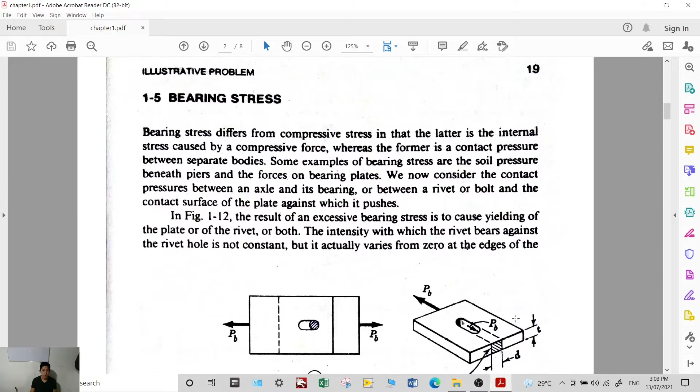Bearing stress differs from compressive stress in that the latter is the internal stress caused by a compressive force, whereas bearing stress is caused by contact pressure between separate bodies. Bearing stress happens when there are two objects in contact.

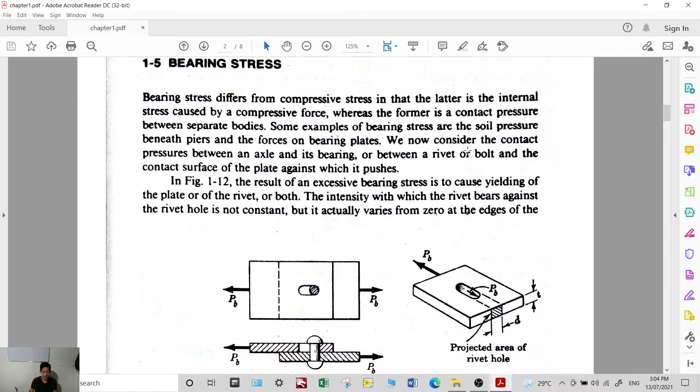For example, we have this rivet connecting two plates. When you pull these two plates, what happens is when the rivet surface contacts the face of the plate, a bearing stress is induced.

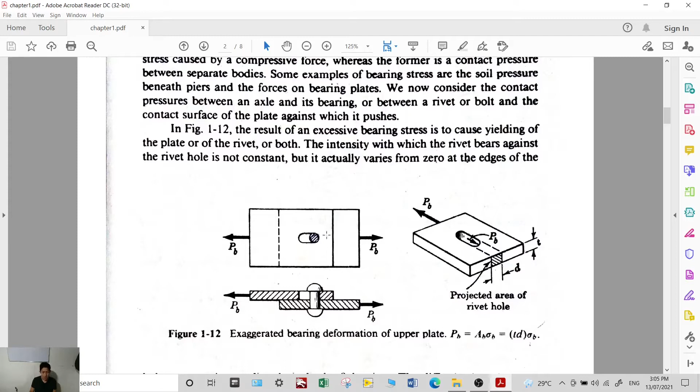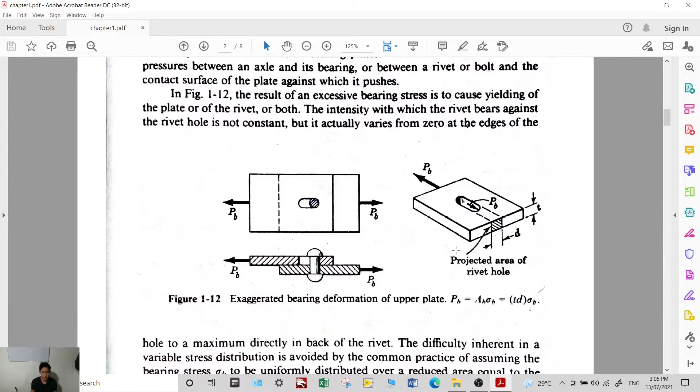In order to calculate that bearing stress, the formula is just force over area. Therefore, the bearing stress is equal to PB over the area that is in contact.

What is that area? This is just equal to this projected area, which is equal to the thickness times D, the diameter of the rivet. If you project this face, you get D times T.

Therefore, if you want to get the value of this force, PB is just equal to the diameter times thickness times the bearing stress.

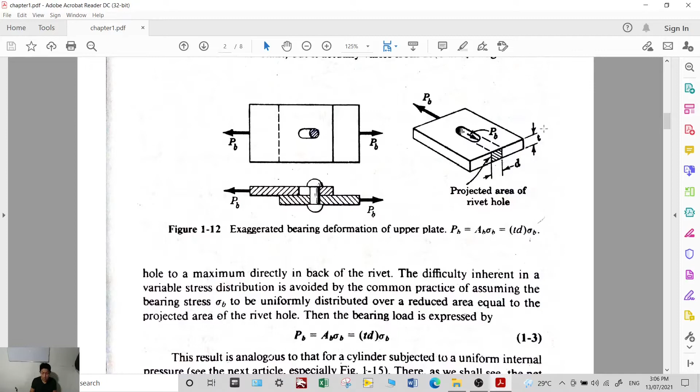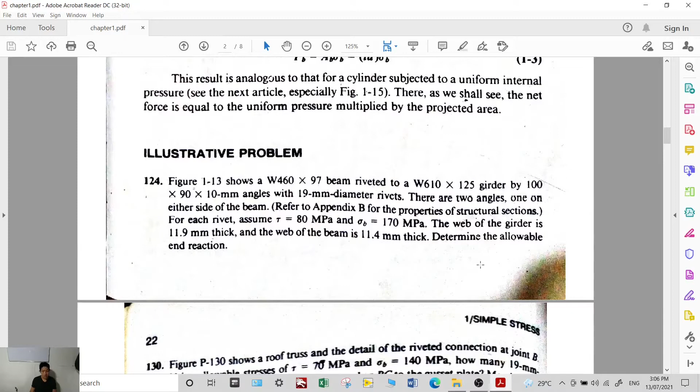We'll proceed with analyzing thin-walled pressure vessels. For this lecture, we will be analyzing the tangential stress and the longitudinal stress experienced by the cylinder due to the fluid pressure. So you have a thin-walled pressure vessel.

The definition of thin-walled is that the thickness over the diameter must be less than 1/10 in order to be called a thin-walled pressure vessel. If greater than that, it is already considered thick-walled, so the equation for that is different.

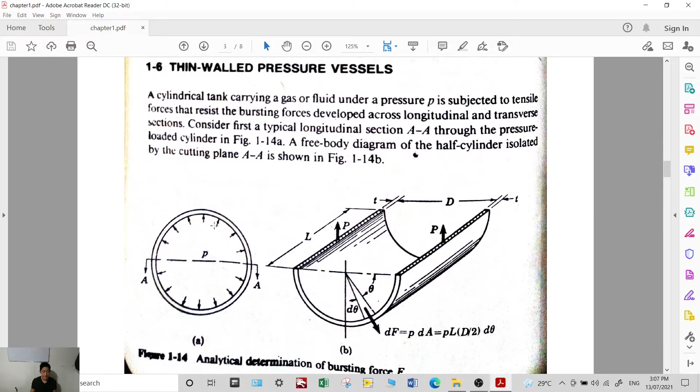Imagine that you have this thin-walled cylinder, and it has a gas inside. The pressure inside the cylinder will be distributed around the area, exerting a force perpendicular to the areas.

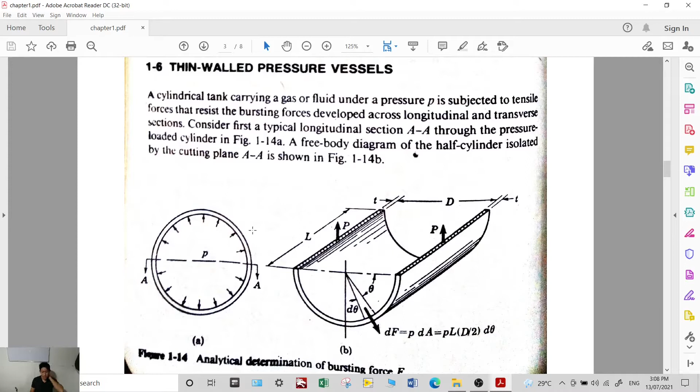So the question is, how do we analyze or design the pressure vessel such that it does not burst, does not fail? Let's cut a mid plane, section A.

So what are the forces that are involved? You have a force that could be anywhere along this area. For the general case, let's assume that it is at an angle theta, and you have the differential force.

Pressure is just force over area. Therefore, in order to get this differential force, you just multiply the pressure times the area. This area is perpendicular to your force, and this area is curved.

It's like an arc segment. So the equation for dA, the differential area, is just d theta times the radius, which is d over 2.

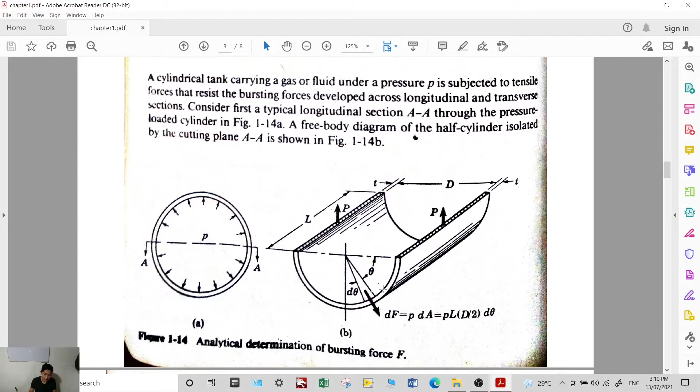Since this area is curved, you also multiply it by the length, L. Therefore, the differential force is just P times L times d over 2 times d theta.

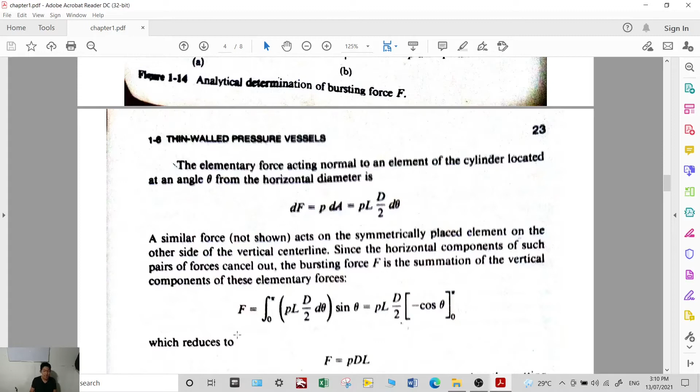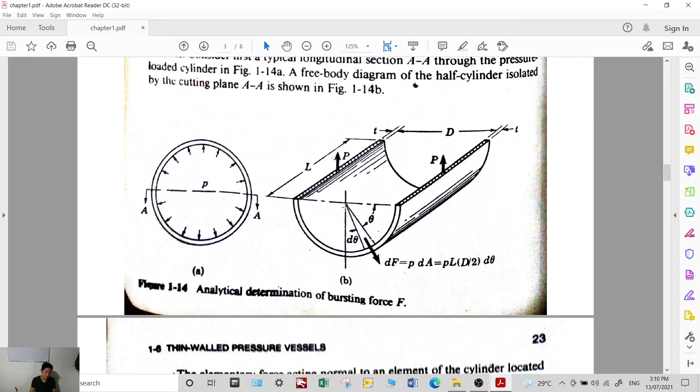Now, if we want to get the total force, we add them all up. But take note, for any force here, its horizontal component is also exerted equally in the opposite direction, so all horizontal components cancel out.

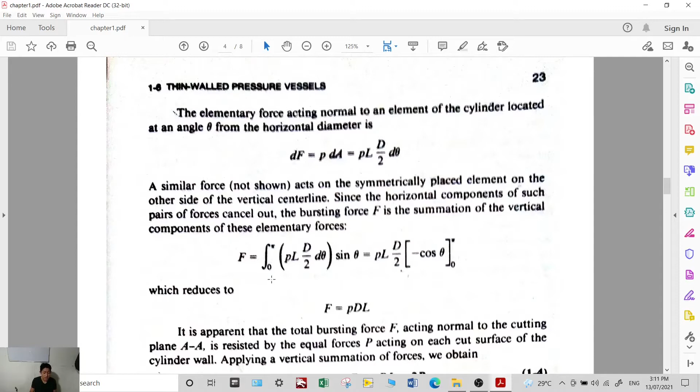Only the vertical force contributes to your total force. So you integrate from 0 to pi, adding all the terms: P L d over 2 d theta times sin theta. The sin theta term represents the vertical component, since the horizontal components cancel out and only the vertical component induces the stress.

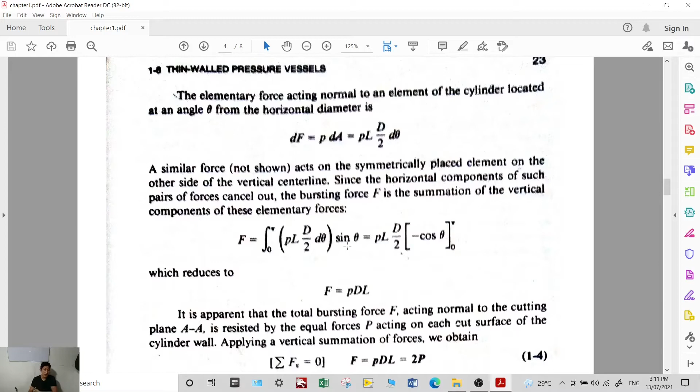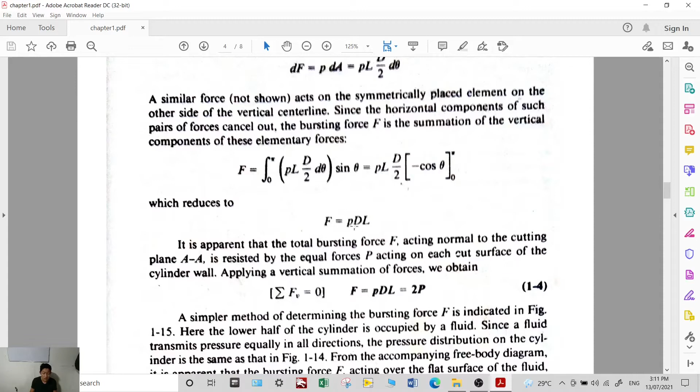So this is just equal to PL d over 2, negative cosine theta from 0 to pi. If you substitute here, you will get total force is just pressure times dl, or like pressure times area, projected area d times l.

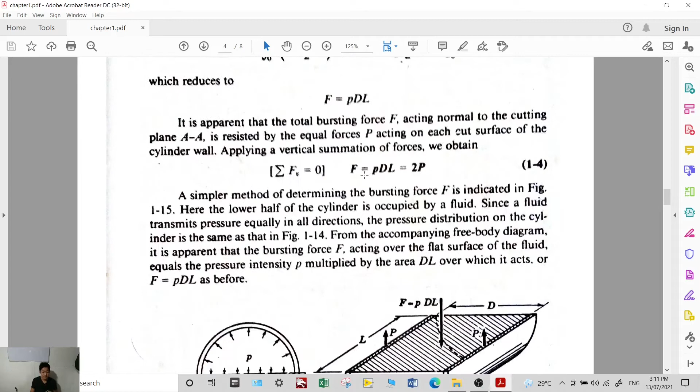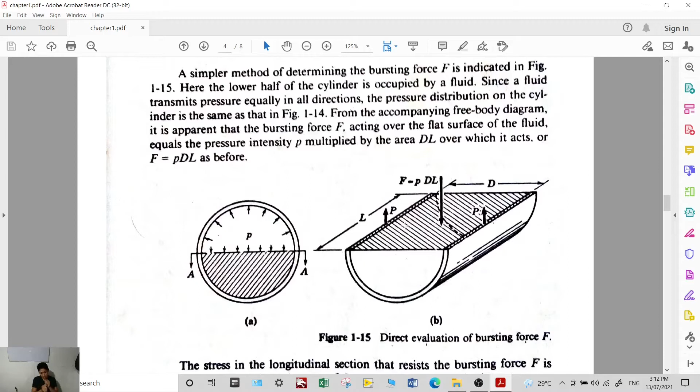So this becomes d times l, P pressure times dl. This is the force that will try to burst your cylinder. So at the bottom of the cylinder, this is counteracted with an opposite force P. If you sum these forces, you'll find out that the force F is just equal to 2 times P.

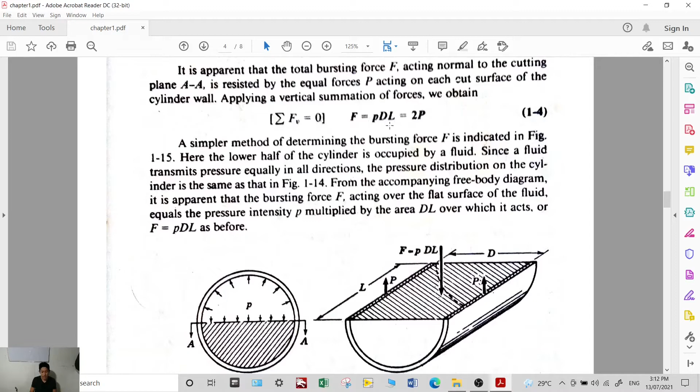And then the stress in the longitudinal section, this section here, this small one since it's thin. The stress in the longitudinal section that resists the bursting force F is obtained by dividing it by area.

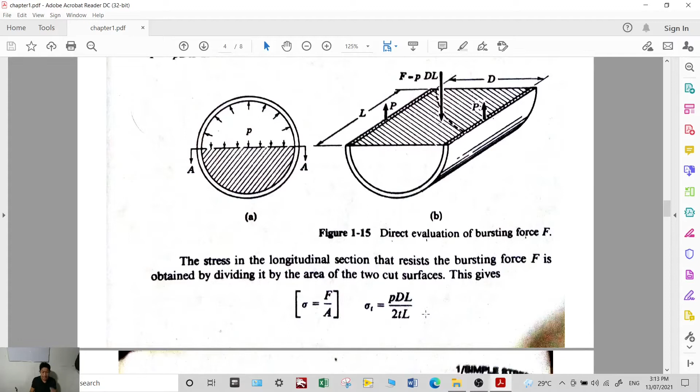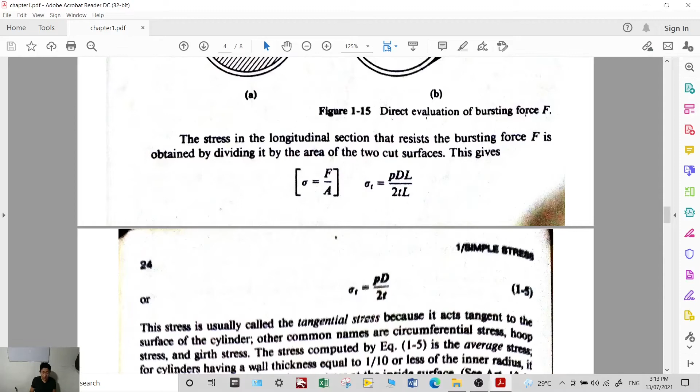So you have force. What is the force? P d L over 2 T L. 2T because there are two areas, two thicknesses times L. So we cancel out the L. We found out that the tangential stress, the stress experienced here, is just equal to PD over 2T.

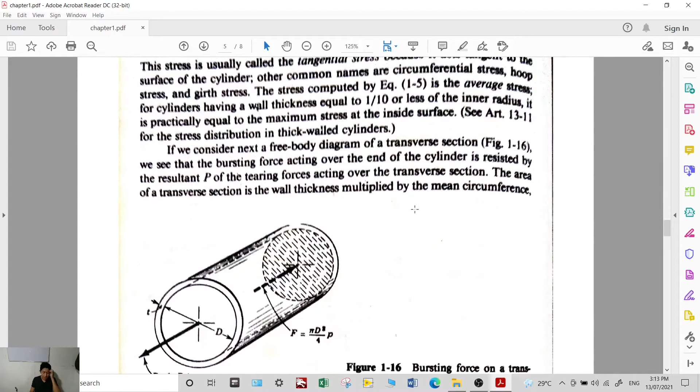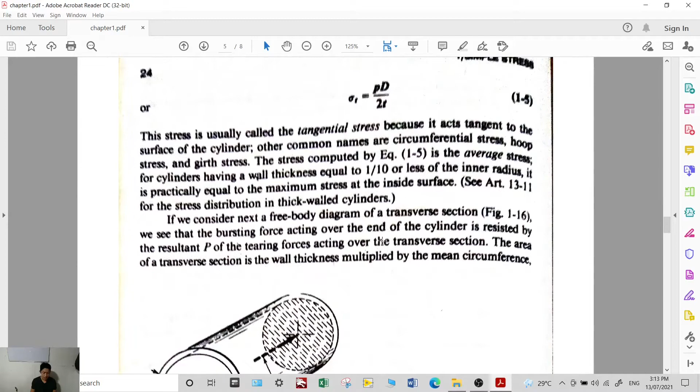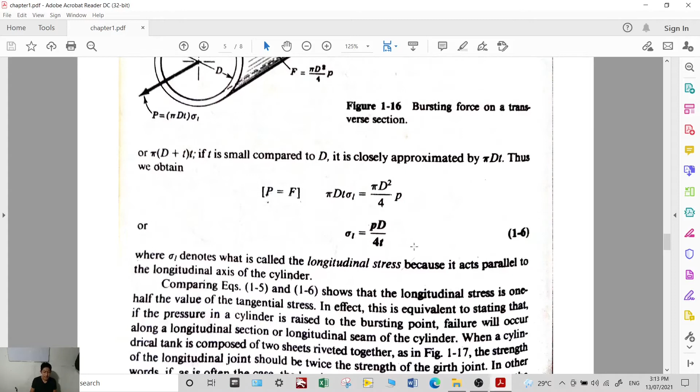So that is for the tangential stress. How about for the longitudinal stress, or the stress you experience at the end of your cylinder?

So how do we derive that? Again, you have the bursting force, which is just pressure times area. So you have P, so what is the area? That area from before. The area is pi d squared over 4. So this becomes that, and then it's resisted by.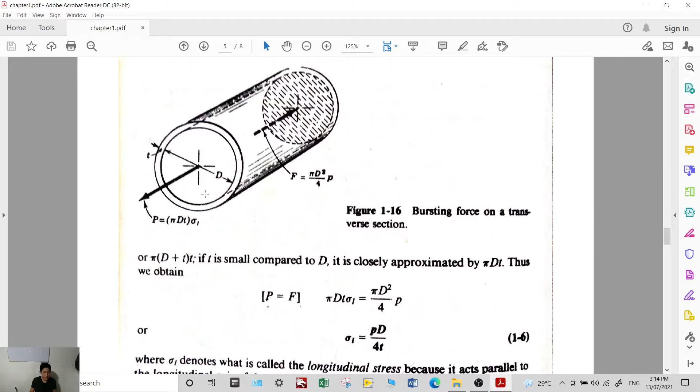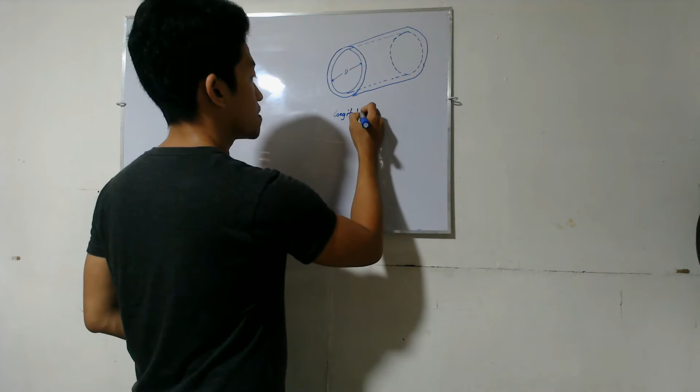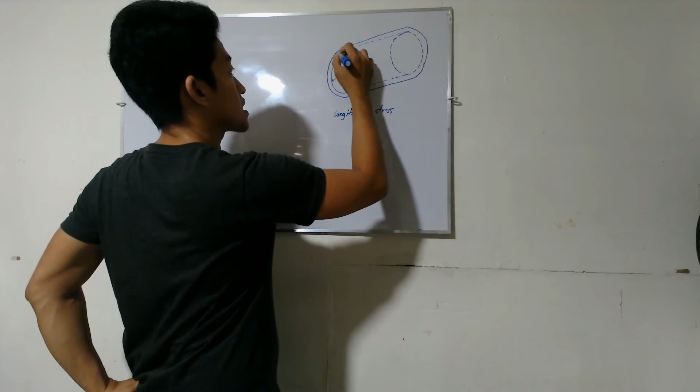Let's derive the longitudinal stress for a thin-walled pressure vessel. So the longitudinal stress will be experienced at this area of your cylinder.

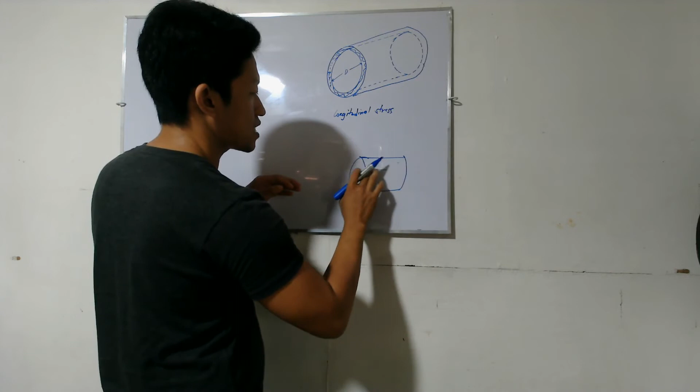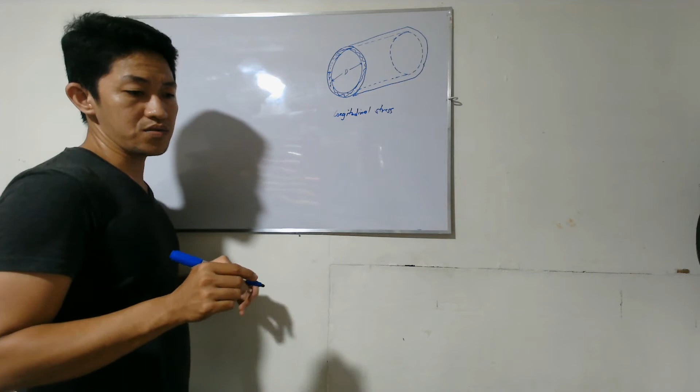First, you determine the forces that will try to burst your cylinder. It is caused by the pressure of the gases inside.

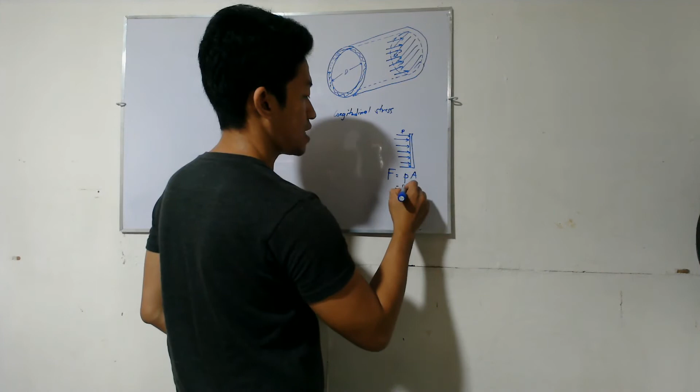So the bursting pressure force is just pressure times area. So what area? This area. So that is P times pi d squared over 4.

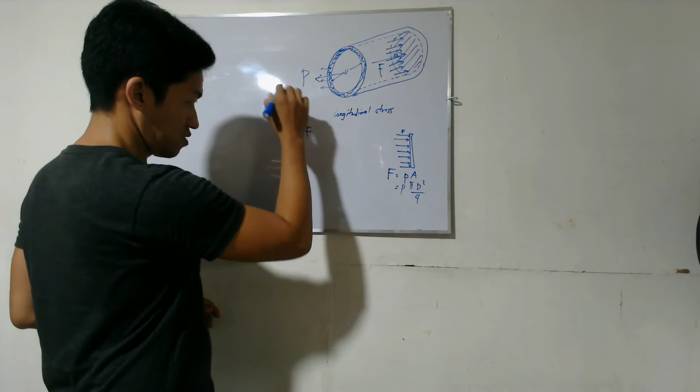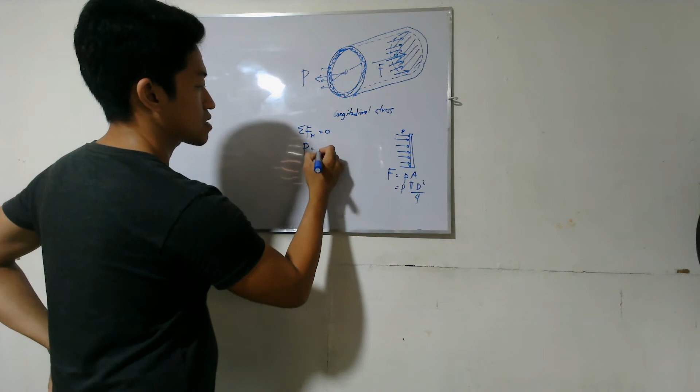If you sum all these forces, you get capital F. Therefore, summation of forces along the horizontal is equal to 0. So you have capital P is just equal to F, or that F is P pi d squared over 4.

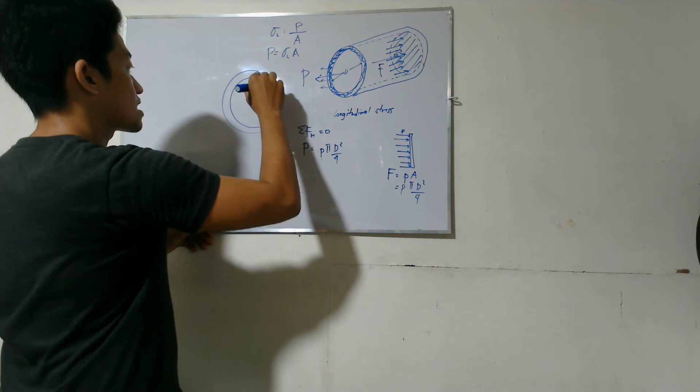So what is this area? This area here. Not D, this is T, thickness.

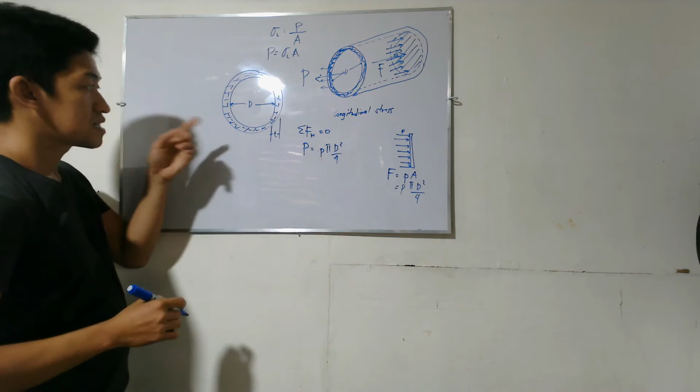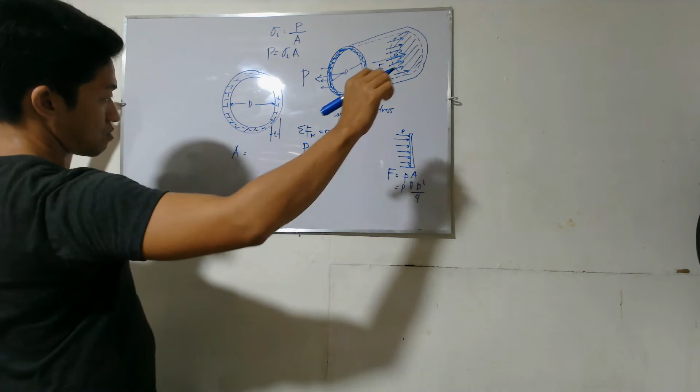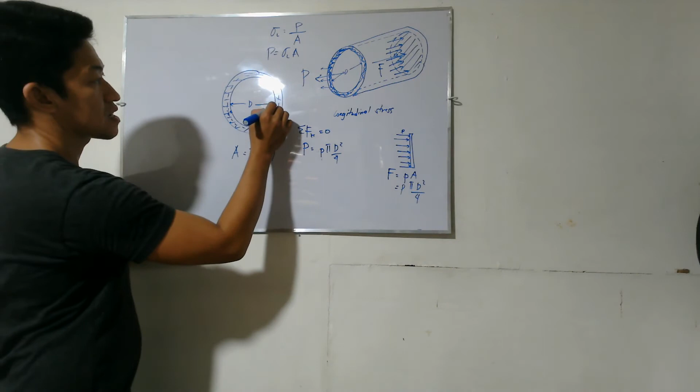Kay kuan man 1/2t, 1/2t. Kung i-add nimo ni 1/2t plus 1/2t, so mahimo ning d plus t. Circumference pa ni, circumference, para mahimo ning area times nimo og t. Kay length pa man ang circumference, so unsa ang length ani. Mao na siya. Therefore, mahimo na ning sigma L.

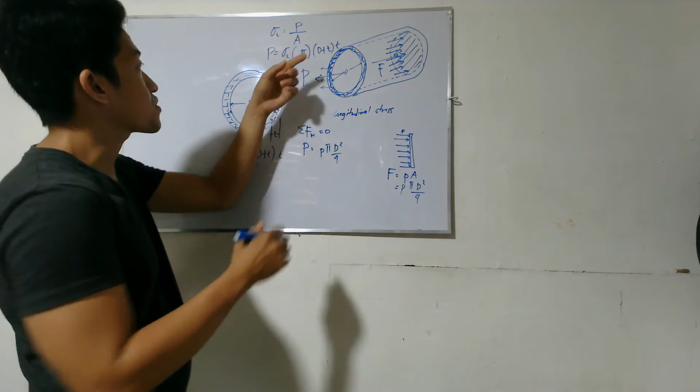Pi times d plus t times t. But if t is small, usually compared to d, kung gamay pwede nimo ni approximate to d na lang. Okay, so mahimo na ning P is just sigma L pi dt. So ato na siyang i-substitute dire, you have sigma L pi dt is P pi d squared over 4. Cancel lang isa ka d.

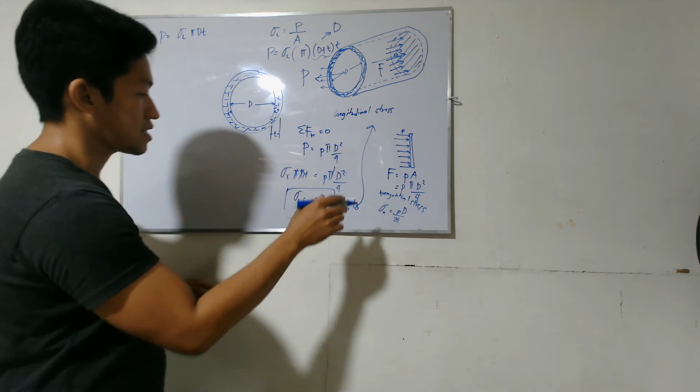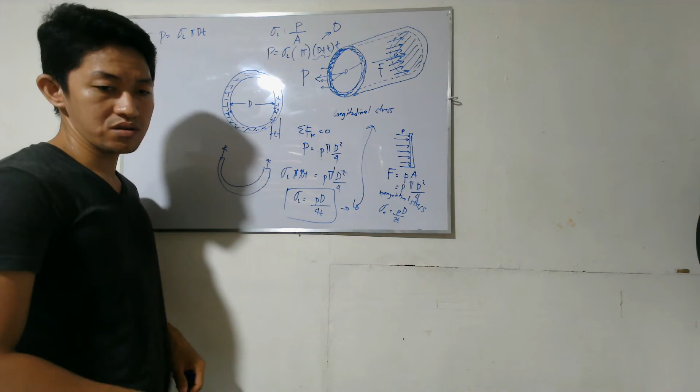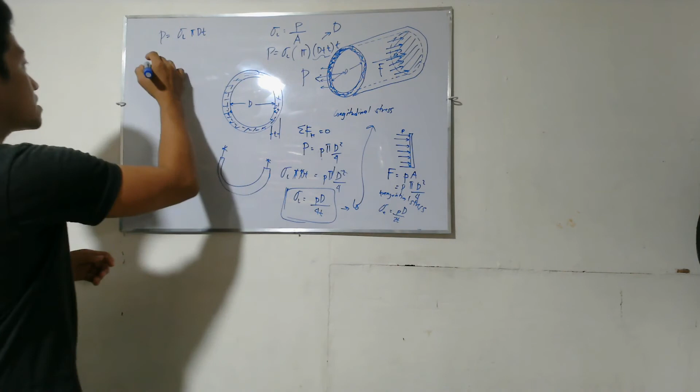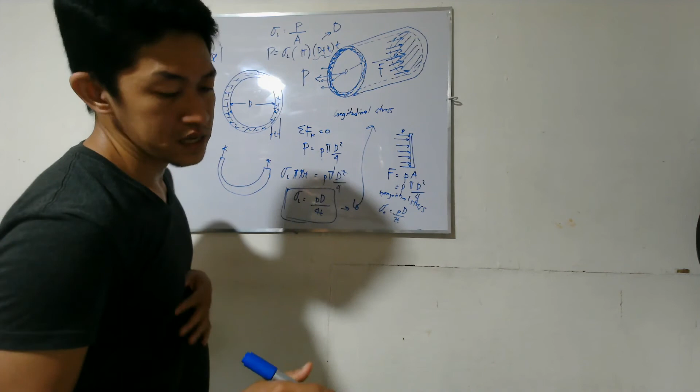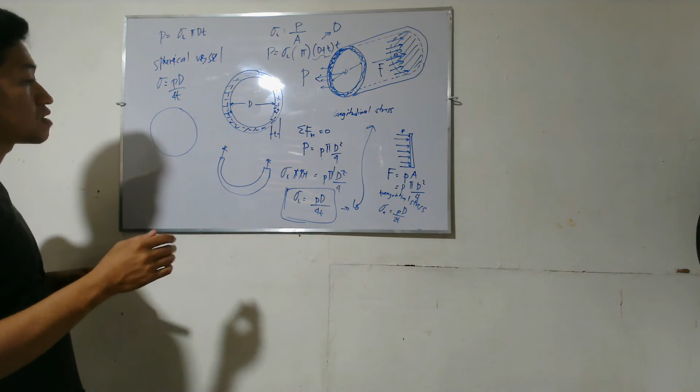Okay, for a sphere, spherical vessel, thin-walled gapon, isa ra ni siya kay pagkuha nimo sa sphere, isa ra man na siya. So for a spherical vessel, ang stress experience niya is thin-walled spherical vessel. Sigma is PD over 4t. So almost the same sa dire, for a spherical vessel. Mas ano ni? Gamay, weak.

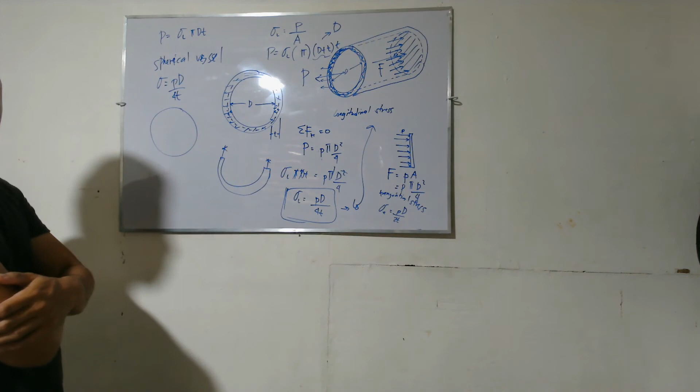So unsa man yung mga parameters kinahanglan ninyo? P is pressure, diameter. Tulo lang, no? Pressure, diameter, and thickness. That's it.

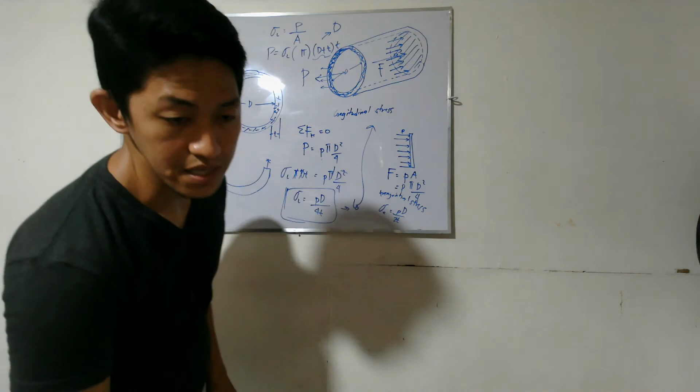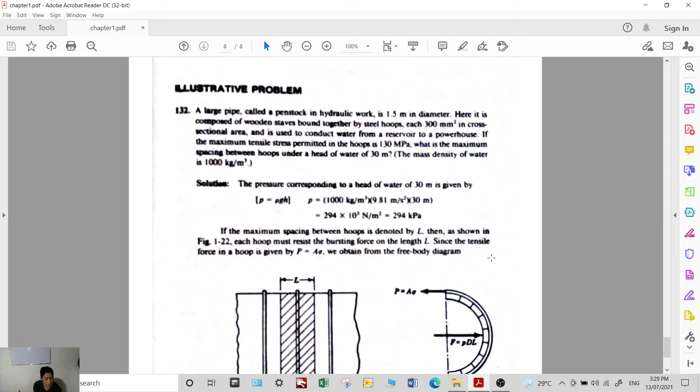Okay, so let's have an example in analyzing a thin-walled pressure vessel. So you have a large pipe called a penstock in hydraulic work. Now the diameter is 1.5 meters. This pipe is composed of wooden staves bound together by steel hoops, each 300 mm squared in cross-sectional area, and is used to conduct water from reservoir to a powerhouse. If the maximum tensile stress permitted in the hoops is 130 megapascal, what is maximum spacing between hoops under a head of water of 30 meters? The density of water is 1,000 kilogram per m cube.

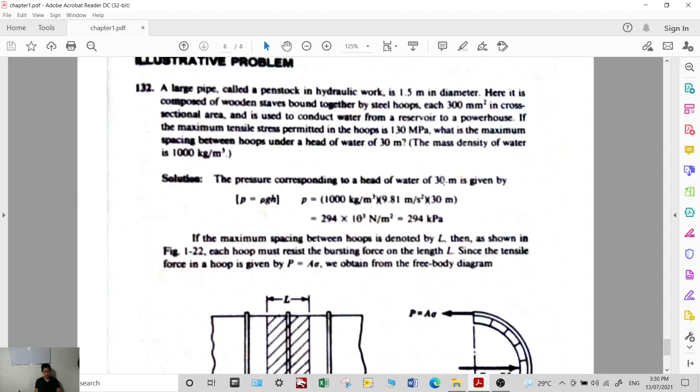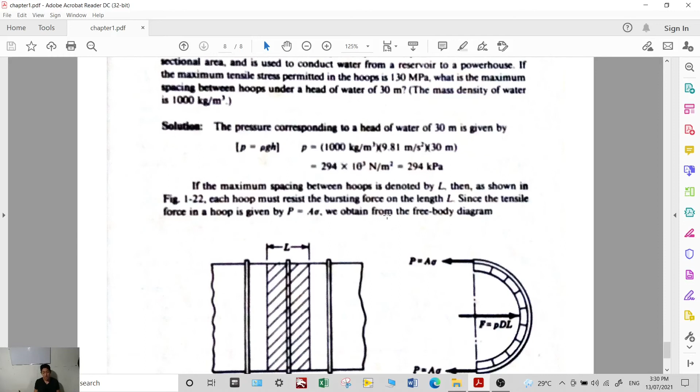Okay, so what is asked is this one, L. Unsa daw ang spacing ani? Ang spacing sa imong hoops. Okay? So in order to derive that one, we need to solve first or get first the free body diagram. Okay? So kung mo-cut nimo imong pipe, i-cut na ni siya og half.

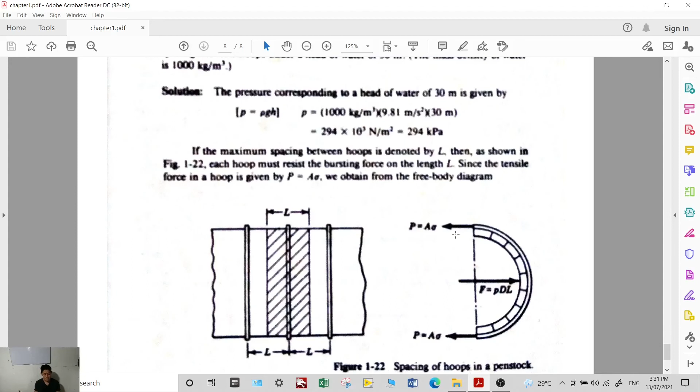This is the pressure niya is P pressure times dl, based on our previous discussion. And then ang pressure nimo ay ang force nimo nga P na mag-resist ani para dili na siya mo-fail is just area times the sigma or the tangential stress. Okay, so summation of forces, you will get that PDL is just 2P, based on this one.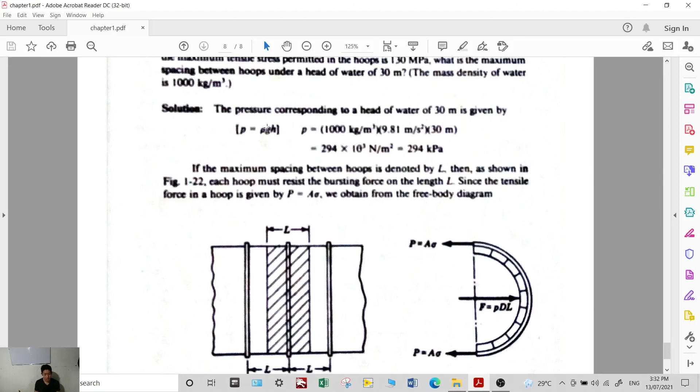So we need to get the pressure. Ang pressure nimo is from fluid mechanics, using rho GH. Mo-ni ang pressure head sa imong water for 30 meters. Kung naay 30 meters na water, ang pressure sa bottom ana would be rho GH. So you have rho is 1,000 times 9.81 meters per second squared times 30 is equal to 294 kilopascal. So that is the pressure.

And then multiply that by 1.5 ang diameter times L, kani nga L. And then this is equal to 2 times P. What is P? Kani area times sigma. So unsa ang area ani? Ang area ani niya is thickness times L. Oh no, ang area ani niya, given naman na yung area ani.

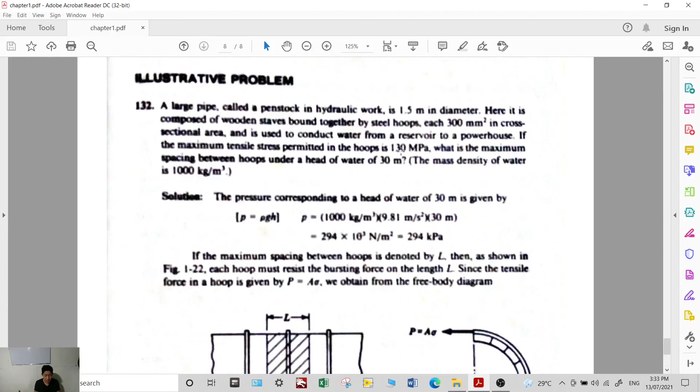Na dari, 300 mm squared. So 300 area, 300 times 10 to the negative 6, to convert from millimeter square to meter square, times the sigma, stress 130 times 10 to the 6, given mo na dere megapascal. Okay, therefore we get that L is just equal to 0.177 meters or 177 millimeters. Okay, so that's it.

So naa pay daghang example sa book, no? So try to solve as many examples as you can.